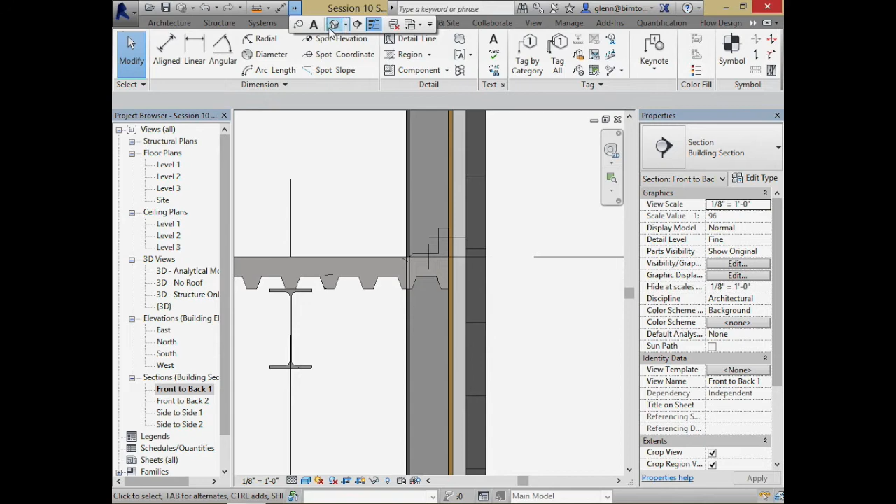Let us then turn our attention to some other matters at hand. Okay, let's go back to 3D. We'll see how this looks. So I got my building hanging around over here. Let's go ahead and look at the structure only. Zoom to fit. Let me turn off those walls again.

Looking pretty good. My building's looking fine over here. It's got all sorts of floor support. It's got some roof support. It's got columns. Loads are hopefully coming on down to the ground, although we should put a little structural support down there to make sure that we're not overstressing the ground.

However, my building's in trouble. And my building's in trouble for the very reason that so many buildings collapsed during earthquakes. It's got all these nice sticks pointing up, but as soon as anyone just pushes a little bit on the side, it's highly likely it's going to go, and it's going to tilt, stuff like that. We need to provide a little bit of lateral support. So let's talk about that.

Because lateral support is an ever so important issue. We're very aware of it here in Northern California because of the earthquakes. We're very aware of it when we're doing tall buildings because of the wind forces, which actually need to be much stronger as an effect than the earthquakes. But either one of those two forces could dominate. What it really means is that we have to brace the building for something that's happening sideways.

It's interesting. Gravity loads are actually relatively constant. The weight of the building and us dancing around in it, that's most of the time. Snow on the roof every once in a while, but it doesn't change drastically. Earthquake loads, you gotta picture this. One day you're sitting there, perfectly happy, and someone just comes rushing at you, 100 miles an hour, and pushes as hard as they can sideways, and you weren't even ready for it. And you have to respond to that.

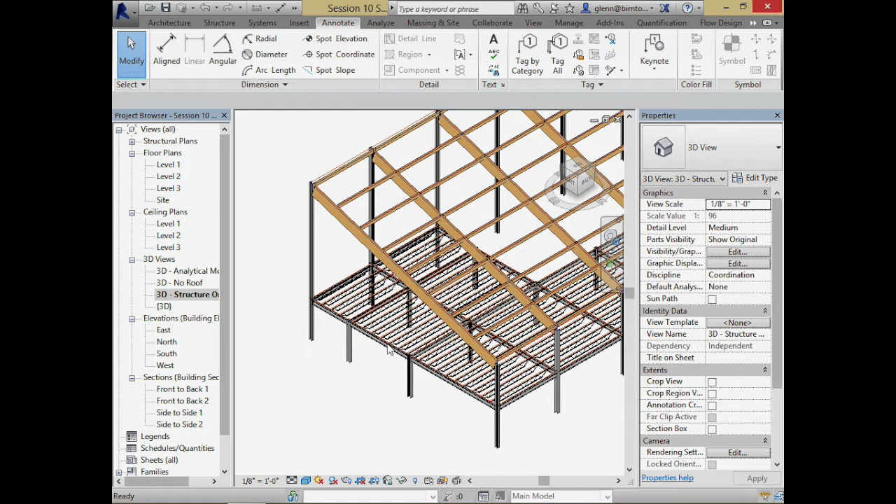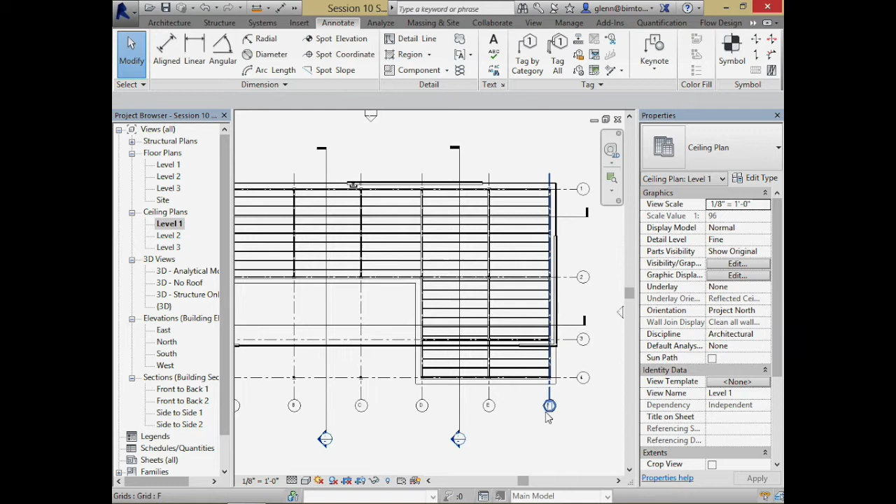So just so you know, as we go through and think about our building, let's look at it in the floor plan view. Basically, we have to resist the lateral forces on each of the different sides. So we have to resist them in the back wall, in the front wall, in the side wall over here, and in the side wall over on that side.

So at the bare minimum, we have to have reinforcement in both directions. It doesn't have to strictly be at the exterior wall. Depending upon the length and size of our building, it may be enough just to do the ends, but you may have to actually put some in the middle too to resist it. It's really this whole notion of you need to have some sort of resistance. Actually, let me even draw this. That might be easier.

So we'll start with a simple case. These are my walls of my building. I'm putting a lot of load on the building. Picture the floor of the building or the roof acting like a big beam to resist all that load. We need to provide some resistance. Half of it's going to come from this side, half from this side. So it's kind of like simple beam mechanics.

In terms of where that resistance comes, usually we'll put some sort of bracing in the walls. I could put that bracing over here, or over here, or all the way back there if I want to. It really doesn't matter a whole lot. Just somewhere along the line, we need some bracing to provide that resistance, if we believe that, like a column, it's not going to collapse. But generally, it's pretty well braced. So we're going to put some resistance that way.

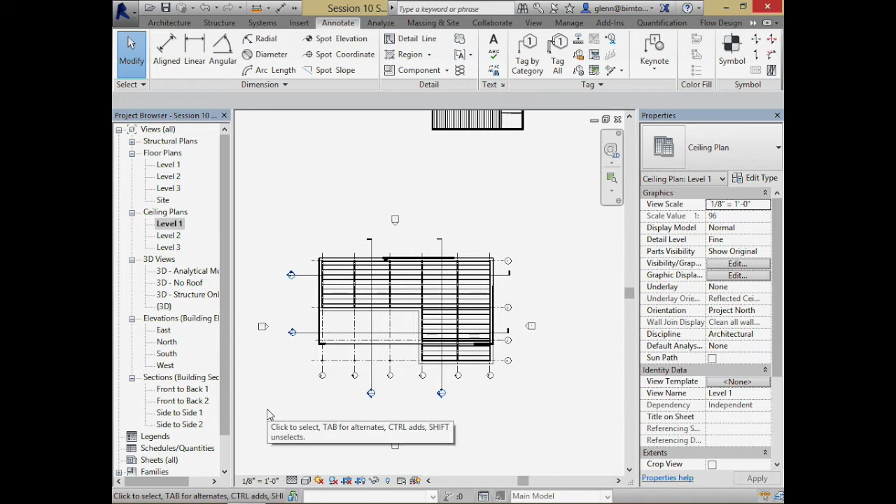So I need to get some lateral resistance, and I have a couple different ways I might approach it. Let me go back out to that structure. I'm looking at the back of the building over here. I can approach it in a couple different ways.

I have these really nice frames of steel going on here. If I wanted to stop that steel frame from racking over, there's a couple of ways I might approach it. If you have a frame and you want to stop it from moving, what are our options? What can we do to stop that thing from moving? How can we add braces to it? Yep. So one thing is to do something like that.

Another way is to do something like this. In fact, if you go over to the Wong basement, you'll see a lot of that kind of hanging around inside the building. A third way we might do it is to actually go through and really reinforce these corners and make sure those are incredibly rigid.

So, with those three strategies, you have the K-brace, the X-brace, or the ever-popular moment frame. Let's think about those three different strategies. Well, actually, let's talk about another one. That's really gross.

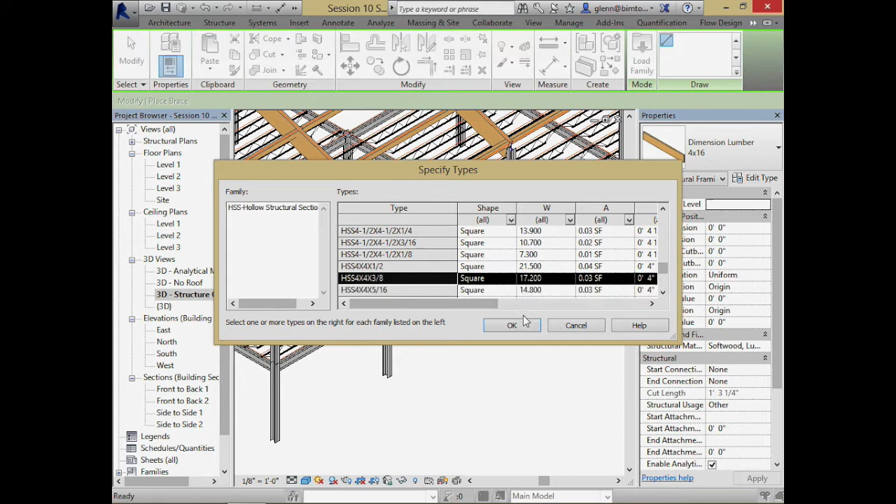Oh, that wide flange 12 by, that sounds awfully big. I'm going to go for some tube steel or something like that. That might be a little kinder. So I'm going to go structural framing. And again, not to worry, we'll figure out how to size these. HSS, thank you so much. Hollow structural sections. Let's go for some 4x4s by 5/16. Yeah, 3/8. Again, we'll figure out the sizing. So I got some hollow steel.

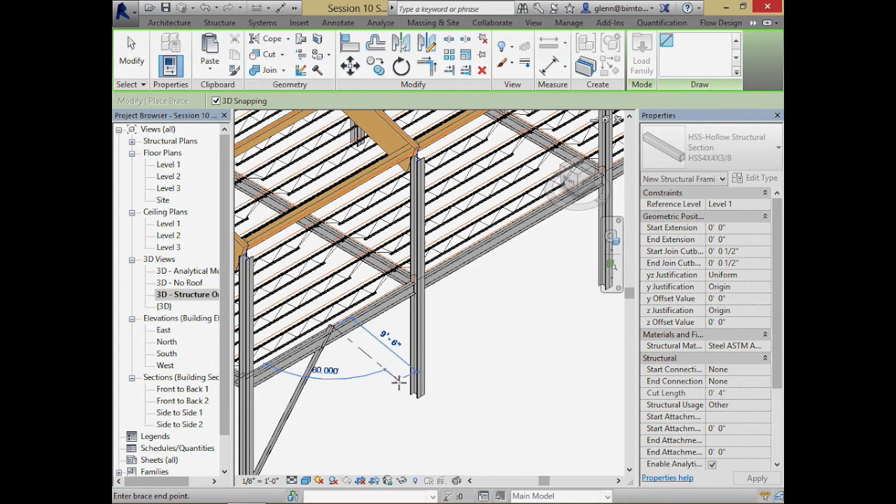What I can do now is, I'll go from the bottom here. I'll go up to the midpoint of the beam. See if I can get to the midpoint of the beam. I'm very bad about snapping sometimes. Oh, there it is right there. Oops. Boom. I'll snap it down there.

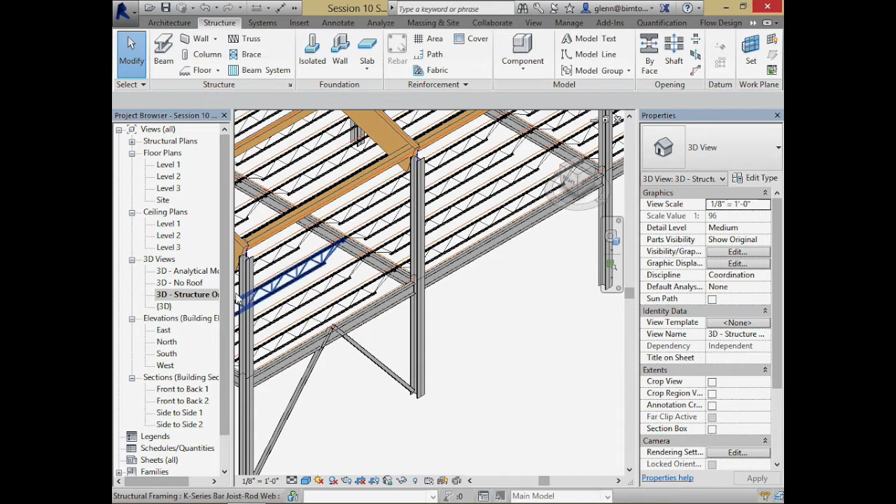Now again, you're going to say, hey, that looks kind of wonky. That's not right. Yeah. Analytically, it's right. Graphically, it's not looking so right, but that's okay. We can fix that. Ultimately, we'll do something there to cut off the tubes and cope it and put the haunch in and stuff like that. But how do I know it's analytically right? Because if I go back to the analytical model and look at it over there, I can see that's actually looking pretty good in the scheme of things. That's not too bad. So I got a K-brace there.

Let's zoom on out. At my first floor, that may be sufficient. That may be enough to just have it on that one side. I might want to also put one over there and split the load. That would actually help us with a little bit of symmetry. Very often having all the lateral load on one side of the building introduces funny torquing, and that's not so happy in terms of what could happen. So maybe I'll put one over there too, and that would allow us to split the load.

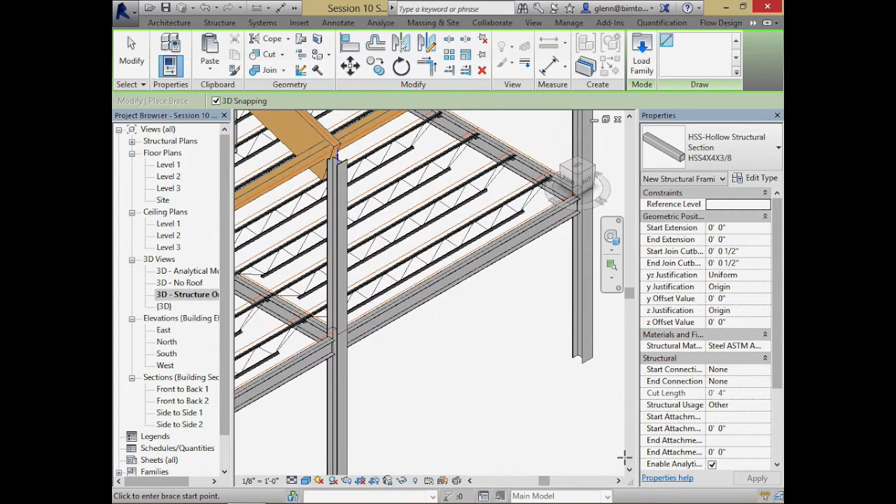But architecturally, what you end up having to do is think carefully about where is the best place to put these. Bracing, bracing, bracing. I'll go from here up to there somewhere. Sometimes I have a hard time finding middles. I should snap. There we go.

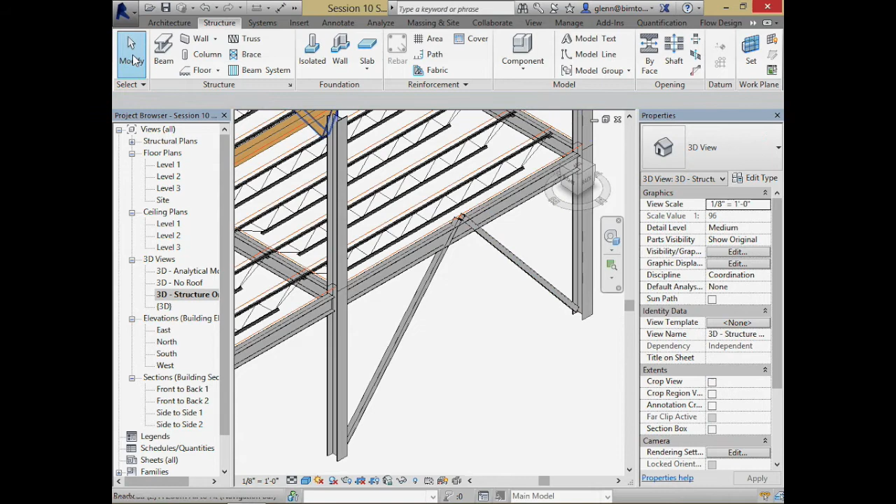Okay, and that'd probably be a little bit better. Okay, in the scheme of things, see any problems with K-bracing? K-bracing works very well structurally. How about architecturally? What's that? Yeah, it could be.

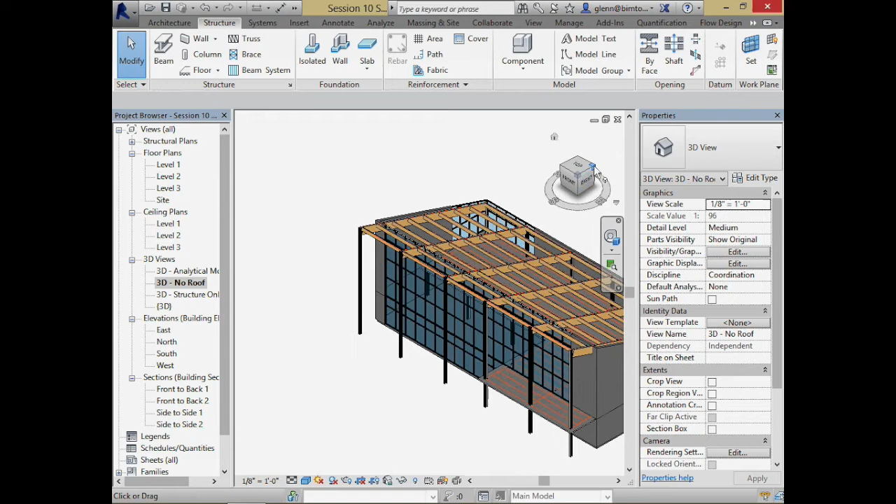In fact, as I think about my building, I probably wasn't very smart about this, because if I go back to my building and go rolling around back over there, I conveniently put those K-braces right in the middle of my big glass view, so that probably wasn't a very smart move. Architecturally, it probably would have made more sense to put them somewhere here in the middle, behind all that closed panel, and that's okay. Again, as long as we keep it balanced, we're going to be okay.

There's better, yes? If your structure is inside of the architectural facade, yeah. So you're just having the K-brace in the middle of the room, essentially? Yeah, it's actually in the room a little bit. What will often happen is it'll get enclosed by something so you don't have to look at it. Even in this building, if you want to see the braces, go to the copy room right behind me here, and you'll see them coming down. There's this big diagonal brace coming through.

Or if you go into the long basement, right to the center of the big student area where we're working, kind of under X, you'll see them all hanging there in the entrance. So sometimes you leave them exposed; it could be architecturally interesting. Sometimes you hide them. It depends on what you want. I kind of like keeping them exposed, but you've got to think. K-braces do have that thing of, well, they're there. They're in your space. So let's go back to the structure only. So K-braces aren't too bad.

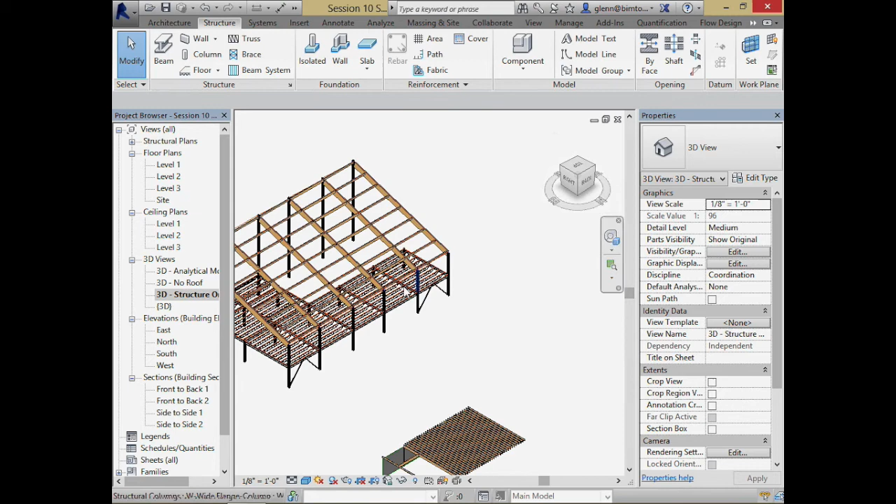Another way to approach it, closely related, is the ever popular X-brace. So how do X-braces work? X-braces would work, although it probably wouldn't be a great solution here, because I should put a steel beam up there to really make it work nicely. But I'll put something across there and put something across there. Now again, that looks like it's just crossing. There would actually be some sort of a connection in there with 4 different tubes coming off of it. That's actually how it's done over in Wong.

So ultimately, is there a lot of difference whether it's a K-brace or an X-brace structurally? Yeah, the X-brace is more efficient. Okay, just a better shape. Yeah, with the K-brace, you put a lot of load in your beams. You have to make bigger beams and have them carry it, whereas with the X-brace, it's all handled just on the endpoints. Okay, so X-braces can work. There's a little fabrication, but again, they're a very good solution, so a lot of times we use X-braces. That's probably the most common thing I see, X-bracing hanging around.

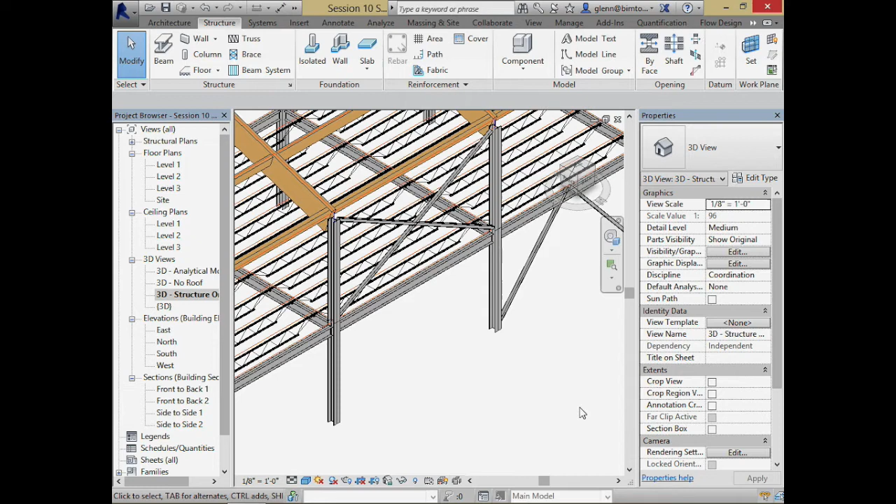So we're pretty good in terms of what's going on here. Either of these ways, they're probably pretty similar in cost and pretty similar in visual impact. K-braces may be a little bit better in that you have a part that isn't so obstructed, versus this, which is pretty much squarely in the middle of the bay. That's not so good looking. But either of those methods works out pretty well. You add a little extra steel, everything's put together nicely. Okay, let's go popping around to the other side of the building.

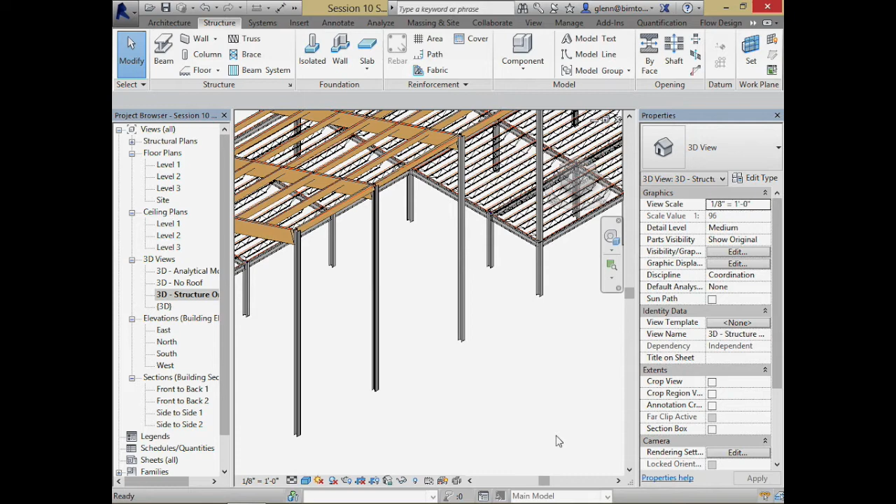Kind of more interesting out here. This is, for example, where I have these giant columns coming all the way down from the lower patio area all the way up to the 3rd floor. So I could put a big X-brace or a big K-brace in there, but that might be more architecturally impactful, so I may not like that so much. So then I pull my 3rd trick out. I can start thinking about a moment frame. Let's talk about what a moment frame is. I'll just put it right in the center here. I'm ultimately going to put a piece of steel there to make it work, because it is going to require steel.

Here's what we're going to do. We're going to take that piece of steel up here and these columns over here, and we are going to weld the hell out of them. We're going to go through and put all sorts of steel reinforcement in here, weld it all together, and make something that is so incredibly rigid as a big U-shaped frame that it is not going to allow any movement in the case of these lateral loads. Okay? And we can do that.

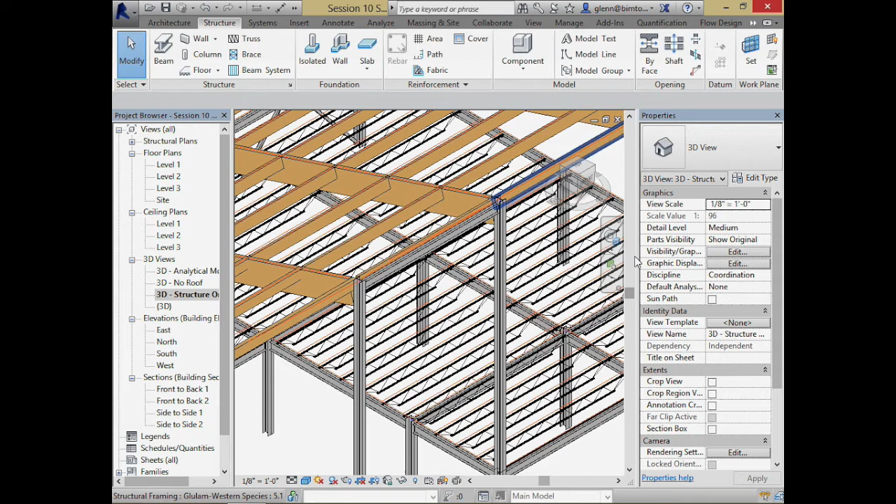You'll see incredible double wall, multi-layers of plating and welded reinforcement here, and they come on out to the site and erect it there. What happens is this thing typically gets welded out in a shop somewhere and brought out to the site in a big frame.

It's kind of a nice way of doing it from the standpoint of visually, it's very low impact. It takes care of the loads in a nice way that doesn't impinge on the architecture at all. But trying to carry everything through a perfectly rigid frame that's going to carry all those loads is an expensive thing to do, and it puts an awful lot of structural loading on that thing. So this whole frame itself may be one of the most expensive structural elements you're truly working with.

But moment frames are there when you need them, and use them judiciously. It is there if you really need to keep things open. It's just another way of doing it. And as we specify them, it's really not all that different. Let me show you actually where they live in the scheme of things.

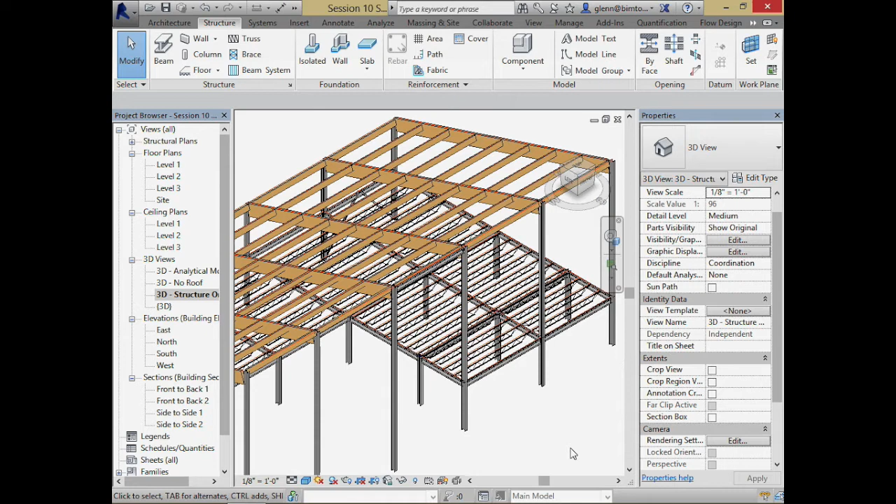As we think about this model and how it works, I just put a piece of steel in there. It doesn't look too awfully special so far. It has these start and end connections. I can say that it's a moment frame right there. And that'll be enough to basically say that analytically I want to treat it a little bit differently, that it's not just going to be a pinned connection. It's going to actually have some moment resistance to it. So moment frames, again, pretty good as a way to do it, although expensive.

Third way we might approach it is, look over here. I don't really have much to work with on that end wall. You can start thinking about using wall panels. And wall panels can be very, very good for doing this. There's a lot of different types of wall panels you can use. You can use concrete wall panels, which is very efficient because in the concrete you can embed a lot of steel, and concrete's actually pretty good when it's reinforced at resisting the lateral forces.

You can actually even have steel shear panels called Hardy Frames or Strong-Wall panels. They have these different hybrids that are available to resist lateral loads. But if you want to put some sort of a structural shear wall in there, let's talk about that. How it would work is something like this. I'd come over to, let's say, level 1.

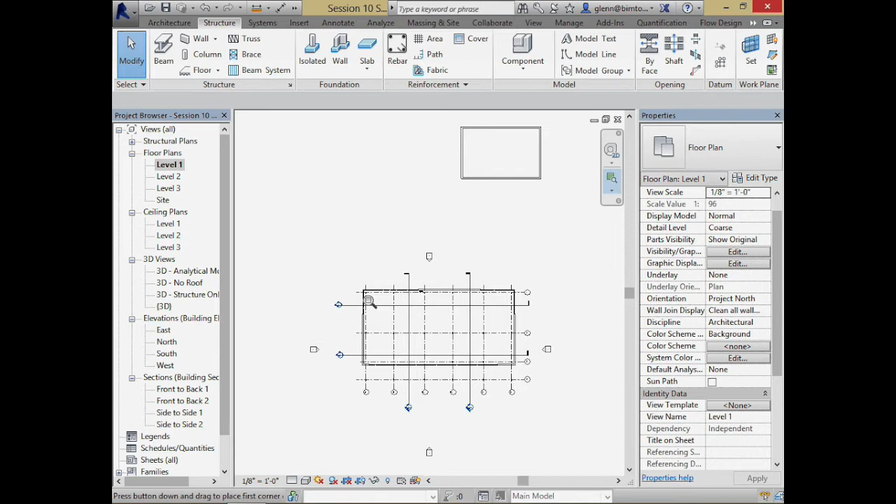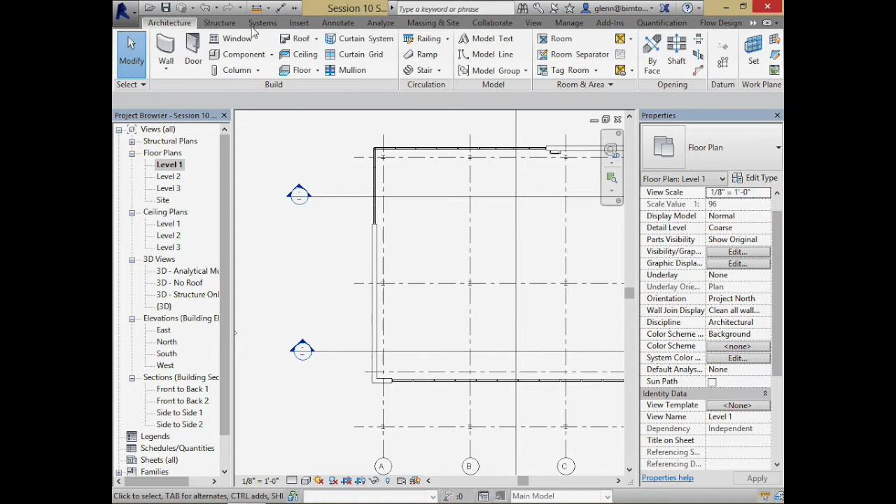And somewhere in that wall, I'm just going to cut out a section of it right here, just so I can change it. Well, I could put it inside if I want to. I don't actually have to put it in the facade. You can decide either way you want to go with it. But if I want to put it right in the facade, architecturally, what am I going to do? Let me choose the wall. Let me cut some section of it.

And say that some section of that is not going to be strictly just the architectural surface. It's actually going to be concrete. Put concrete in here somewhere. There it is. Some sort of concrete wall. We can fix that up so it looks right from an architectural standpoint.

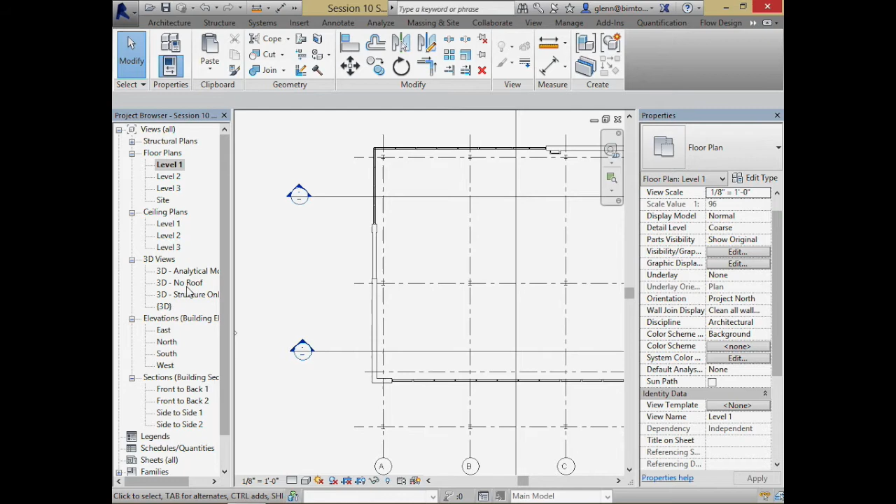So over on the sidewall now, you have some sort of hybrid of materials. What I have to do, though, is run this all the way up. It's not good enough. Well, you can sort of break them, but the more common thing is to actually go through and have these run all the way up the building. So have something like this actually go all the way up to the top, and ultimately get chopped off by the roof.

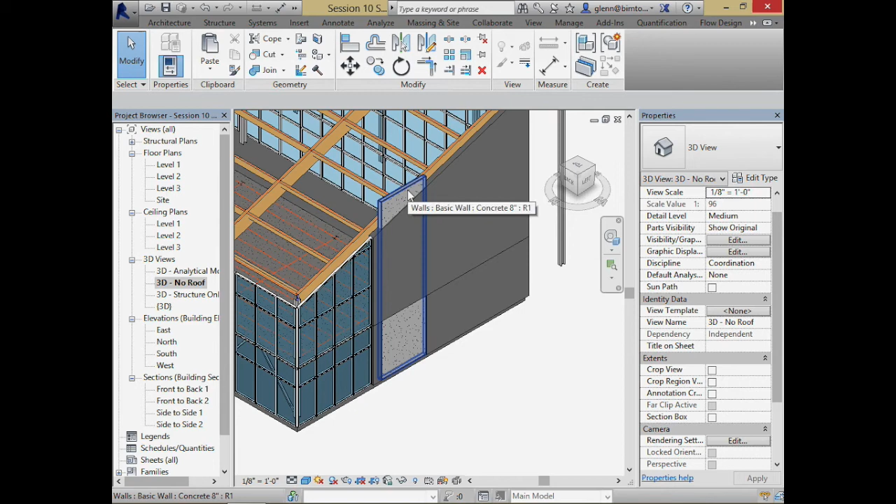Because really what I want to do is basically catch the roof plane as well as the second floor plane and carry them all down to the ground. So I should do the same thing about cleaning up what's happening over here in this wall. And ultimately, this thing is just going to get attached to the roof. So if I go back to the 3D, flip it around, and I can say attach that to the roof, you'll be in pretty good shape.

In my structure only, I took out the walls, and I put the walls back in. There's that wall. If I want that to be a structural wall, I just need to turn on the structural capabilities, and then I can decide, does that need to be considered as a bearing wall or just a shear wall? Either one of those will work, depending on what load case you need. And that's enough to kind of do that.

So what you're going to do is actually start putting in these lateral load resisting elements too, at least on all 4 sides, but we may need some more in the middle, and we'll kind of get to that. But we do that, and that's really how we start resisting the lateral loads. And as long as we have different resistance mechanisms in each of the different planes, we should be okay. But again, we'll analyze that and figure out where we end up.

How much wall you need really depends on the qualities of the material you're using. Concrete reinforced, very, very strong. You probably don't need a huge amount of it. In a lot of light frame wood construction, we actually use the plywood sheathing on the outside of the wood studs as our lateral resistance, and you have minimum lengths that are necessary, because plywood sheathing on the outside of the wall is good for like 240 pounds of lateral resistance per linear foot, something like that. Concrete reinforced much, much better. Steel, even better still, but there's some engineering behind it, and we'll work through that.

But what this will lead us to is we're probably okay enough in our building; we'll have some here, we'll have them on the outside. Our building's not so big, but if you have a lot of lateral loads, because you have a very tall tower and you have to carry all the loads down from 50 floors, or you have a very, very big building, and the distance between the outside walls is too large so that you can't really count on the floor acting like a beam, it would deflect too much. You start adding these things called cores into a building, and that's where it gets really, really interesting.

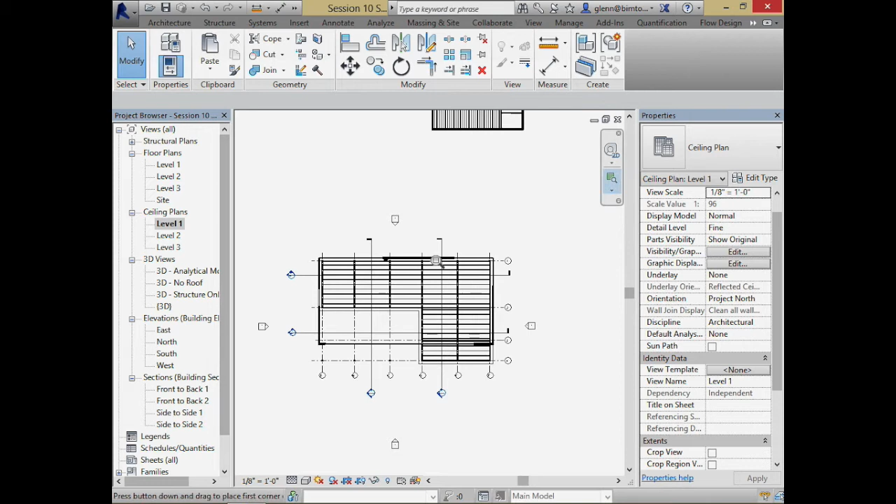So if I needed to add some structural support, and the outside walls weren't good enough, I needed to put some structural support in the middle of the building somewhere to do that lateral resistance. You say, okay, I can do that. Let's go out, we'll grab a wall, we'll make it a concrete wall. We'll make it structural in a second here. I have to place it first. Okay, I'm going to go through and put some sort of core in here.

And I should actually make that go all the way up through the building. Typically these will go all the way from level 1 up to the roof or something like that. Make that structural. Okay, and we have this ability now to put some walls in there. Now, the cool thing about these cores, or how they tend to work together in buildings, is if I need a wall that's going to run all the way from the base of the building up to the roof, you think about the architectural features and what sort of things do that, there actually is a very logical place to put them.

Things that tend to run all the way up the building are elevators, which tend to have very straight walls. Stairways tend to have very straight walls going all the way up. Even mechanical shafts tend to have very straight walls going up. So what do we tend to do?

If we're going to have some sort of core to resist the shear, we tend to use it also as the elevator and stairway and mechanical shaft too. Because it gives you this nice ability to have something with a structural purpose as well as the architectural and mechanical purposes all at once.

So what we'll typically do is we have some sort of core like this, but then we'll add an element that we call a shaft to it. And what is a shaft? A shaft is really just a void. It's an opening. Put it in there. Make it go all the way up to level 3.

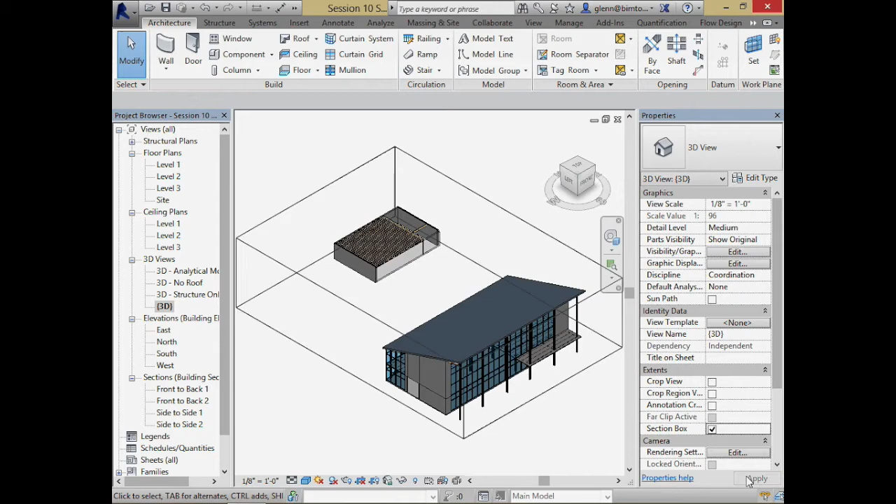Finish it. Okay. What the shaft actually does is it cuts away floor and it cuts away roof. So let me see if I can show that. There's my walls over there. I'm trying to come up with a way that you can actually see this. Let's go 3D. Let me turn on my section box. That may make it easier to see. And I'll scoot that over to where the shaft is, more or less. There we go.

So the shaft is now inside the core. Notice the shaft did a pretty good job. It cut away the floor for me just fine. It didn't cut away the structural framing. It doesn't do that. Shafts are good. They'll cut away floor. They'll cut away roof. They'll also cut away ceiling. So if you have any of those elements, they'll cut them away.

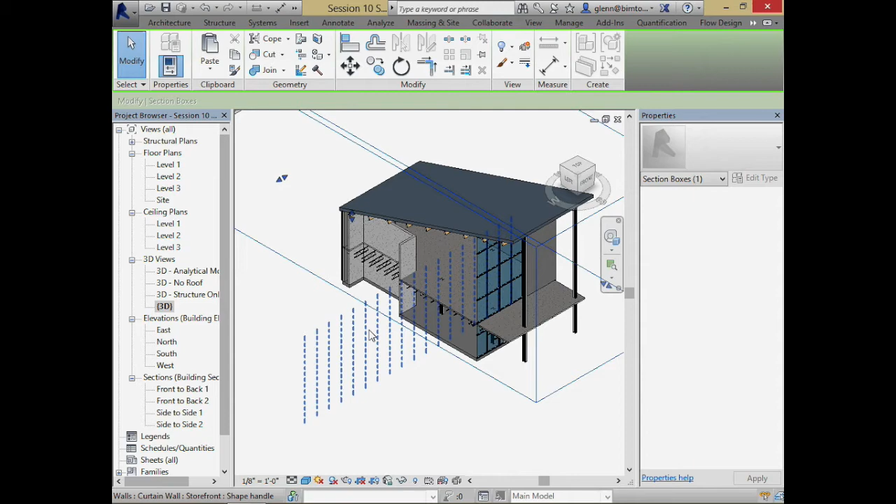It's not so good on the structural framing, so for the structural framing, I'll come back over here and grab that structural framing system. The cool thing is, since it's a system, I can edit it and just put a boundary on this thing. So I could change its boundary to avoid the shaft. Do a little bit of trimming to make sure that looks good. Oops, that wasn't good looking. Finish that up.

See what it does. Actually, those little tiny K-joists on the side probably aren't going to be very happy. I'm just guessing because they're a little bit too small to actually generate. So I think that may give you some trouble. But let's see how this goes. It's still working.

Let's pause and give you a chance to ask questions. So the whole idea of adding these lateral braces or some sort of walls, how's that feeling? Because in your building, you'll need to have some lateral support too, and you can think about exterior walls, or if you have a stairway, and chances are you do, that's again a very good chance to integrate it.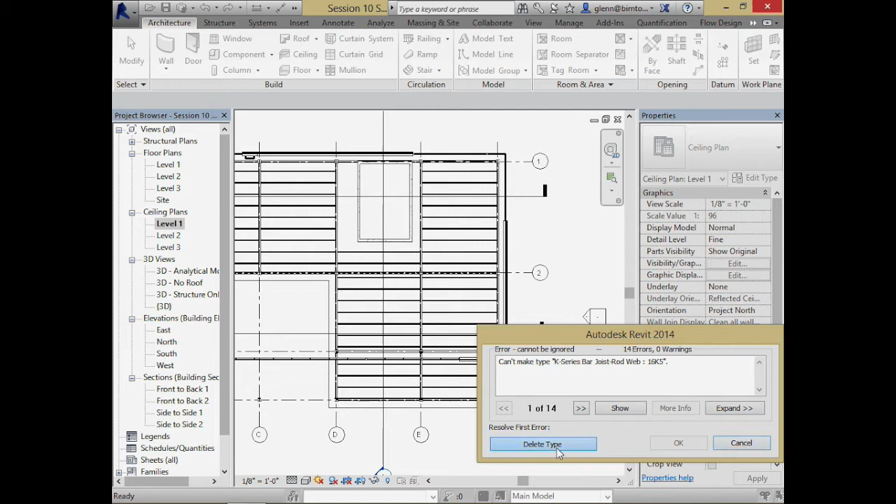Okay, looks like in this case my distances are so small, there's not enough room to make the little K-joists. So in that case, in the area around that shaft, I probably need to shift to a different sort of framing system. In fact, since those are so short, I have to say it can't really be the K-joists. It has to be something simpler like the tube steel, or something that doesn't have a repeated element to it.

The K-joists are just problematic because in order to generate the little spans, there's a minimum length that they would have to be. Let me try that again. Edit the boundary. See if I can get it to regenerate.

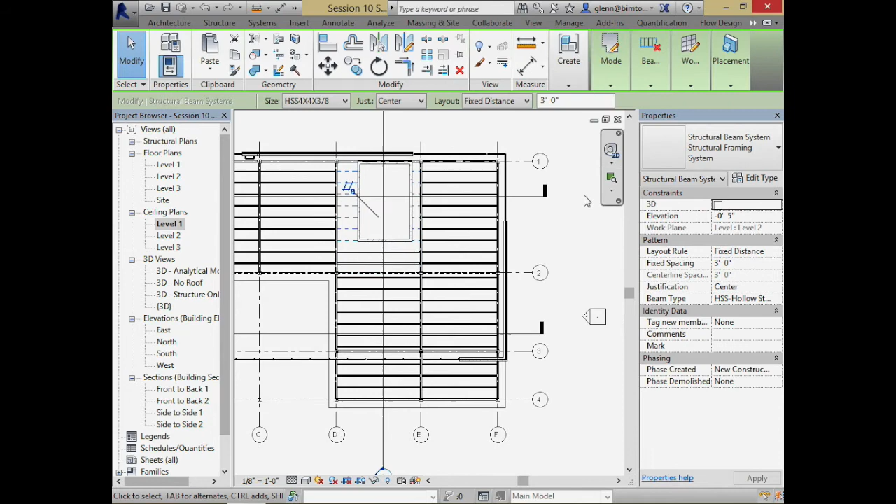Looks like it's sort of messing up on me. Okay. I'll leave that be for now.

Okay. So we got these lateral load systems. We got the vertical load systems. You have a facade related to that. We are almost ready to do some analysis. We're not quite there, but we are almost ready. So let's kind of talk about that final step of how you actually do the analysis and you go with this. Because you've been working so far just inside this system right now. You are ready for the final step. And that looks like this.

So here's my little analytical model. Notice the walls are there. That wall's going over here. That wall's looking good over here. We're in pretty good shape. Okay. When it comes time to actually add loads to this, you can actually add loads in this model too. Okay, so let's talk about the loads that you need to sort of include.

So there's different types of loads. There is the dead load of the building materials themselves. Okay. There are the live loads of us dancing around inside of here, you know, the furniture, the books, all these different things, they all get loaded in there. And there's all sorts of rules about the standard loads we use for different buildings. So, you know, we don't actually do a very detailed calculation.

We tend to use standards that say, like for most living spaces, most common use spaces, the live load is 40 pounds per square foot. Okay, so for every square foot, we imagine 40 pounds here and 40 pounds there and 40 pounds there. And even though I weigh more than 40 pounds right now in this one spot, on average, that's probably going to work out okay because I only occupy so much space. So it tends to work out pretty well as a way to do it.

For the dead loads, based on the materials you're using, whether it's steel or wood, whether it's a concrete floor, stone on top or carpet, whatever it is, we can go through and compute those. We can try and figure out per square foot what we think the dead load is, and just add that all together.

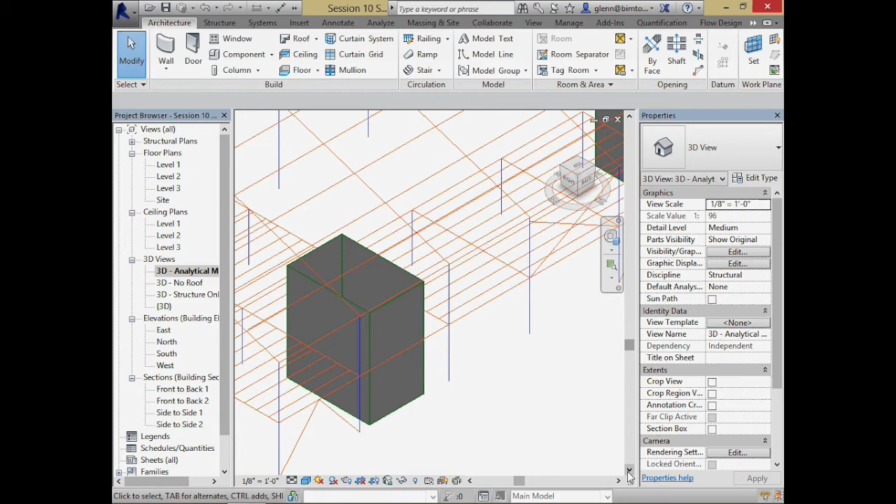Live loads tend to be relatively higher for the living areas, less for the roof, interestingly, because your snow and your occasional rain actually isn't as heavy as we are in the scheme of things, so it's weird. You think the roof would actually have the worst load, but it doesn't. Unless you're in a really high snow area where it stacks up high, maybe you'd have it there. But you can start adding loads to this. Let me go through and flip it around.

Actually, there's one loading condition you have to watch out for that I'm always stung by, because when I do residential construction, I'll often have balconies and areas that are outside. It turns out they're considered much worse than your average living area. It's kind of weird. You think, well, how often are people out on the balcony? What's really going on there? But these tend to be designed almost for the worst case scenarios.

And the problem with your balcony is it's that time when the parade's coming down the street. You have all your friends over who are at brunch at your house, and you're all hanging out there with your mimosas, watching the parade go by, crowding up against each other to get the best view. At that one moment in time, boom, then you get yourself in trouble. It's actually kind of interesting.

If you start thinking about a lot of structural failures, it's often these times when it's parties, and it's times when people all get together. And yeah, there really is a problem. It's sort of extreme use times, and you have to be able to guard against that. Because a collapsing balcony is just never a good thing. Okay, but that's what often happens.

So let's talk about loads and how we'd add them in here. Loads, and we will go ahead and put some loads on your building and have you do a little bit of analysis to test these out. You can apply it in this way. What you got to do is go to the Analyze tab.

Let's talk about creating some loads. And there's different types of analysis here. There's space reporting, there's systems reporting we'll talk about, there's energy analysis. We'll end up using a lot of these different things. Let's just start with loads first.

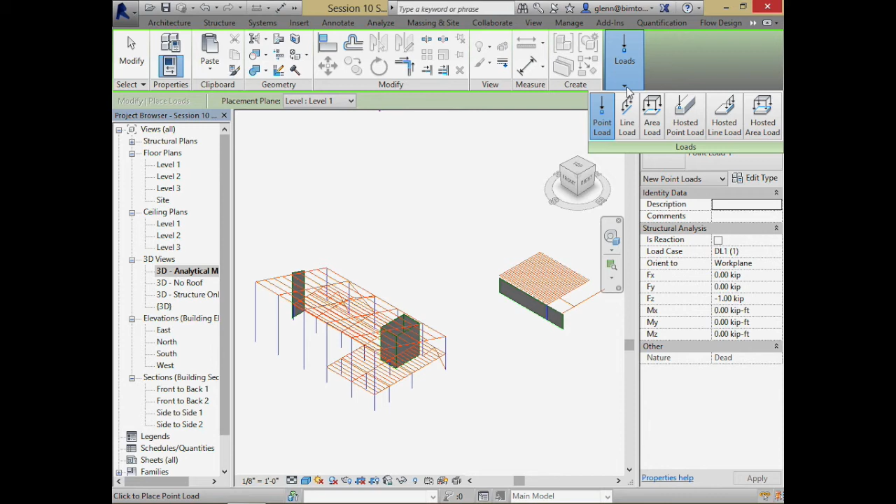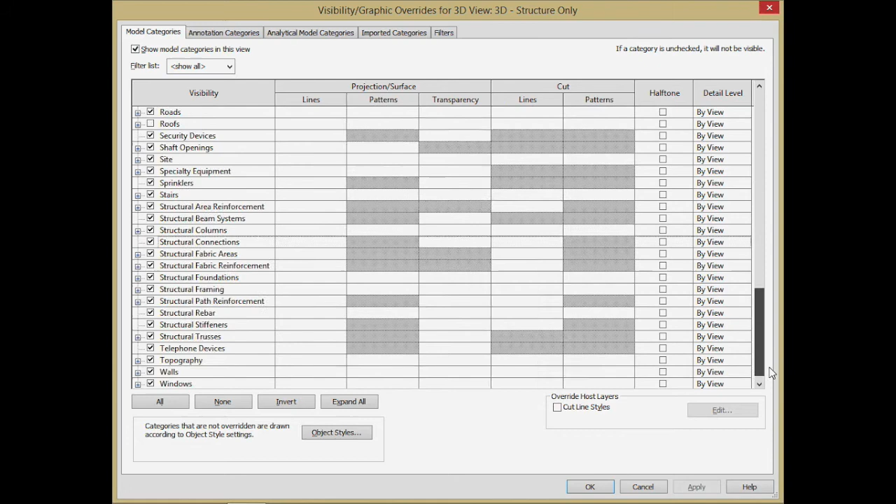Look at my little analytical model. He's looking pretty good there. Let me go to my structure only model. So I just need a surface to put this on. What I want to do is put some loads on the floor. So I'm going to go to visibility graphics, just turn off those walls, but I am actually going to turn on the floors because I want to see those for now.

So I got my floor kind of hanging around in here. I'm not going to worry about that basement floor, the first floor, just yet, because we're going to figure out whether it's a slab or what's going to happen with the foundations of that in a little bit. But for the second floor area, let's start talking about it. We got a big floor area all over, going to wrap around. We got a little bit of it that's actually a balcony out here. So let's talk about how we can create these loads.

And what you got to do is like this. You say load. You say that I want to make it hosted. I'll make it an area load so that if I don't want to just make a load on a beam, I want to put it on an entire floor plane. And then we're going to put a basic loading to it. In the z direction, by default, this is considered to have -1 kips per square foot, so 1,000 pounds per square foot pointing down, which is a lot more than we need. If I want it to be 40 pounds a square foot, it'd be 0.04. Is that right? Yeah. I always have to think about that. Okay. And I can say that's my load.

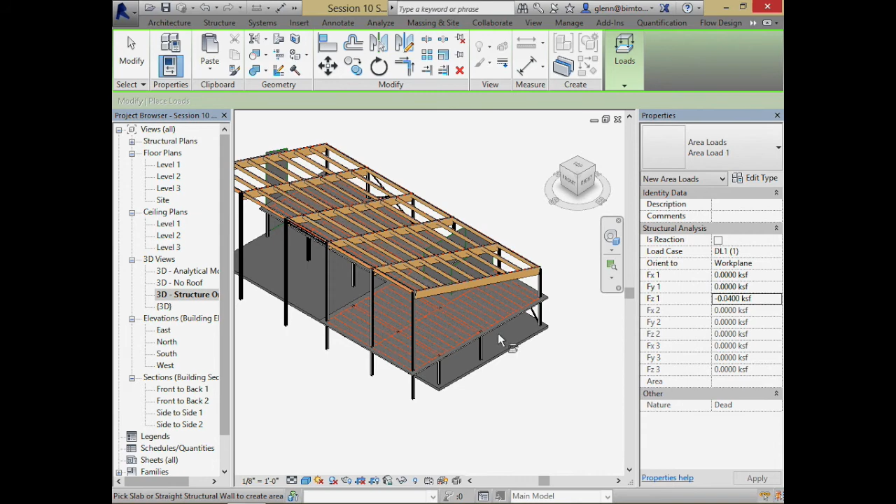Then what I'm going to do is come on over and find a surface that I want to apply it to and click on that surface. Yeah, it's not going to let me click there. Let me see if I have to make that structural. Structural. Let's try that again. Loads. Hosted area load. You going to take it now? Okay, beautiful.

Now you'll notice I've applied this load. It shows up with this little purple line all over the place, and it's looking okay. Although it's not quite accurate yet because it's applying it to the entire floor area. It's also applying it to the balcony area, so that might be a bit of a problem. We might want to separate those things.

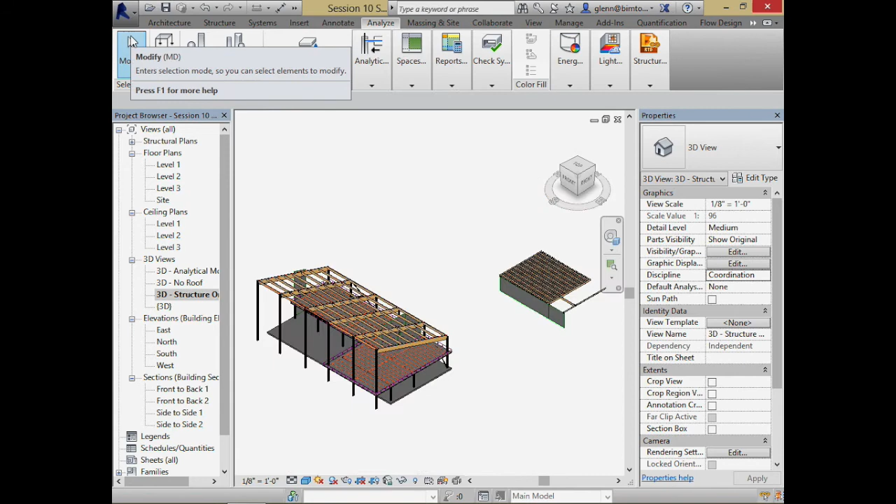What can I do? I could go ahead and add another 20 pounds a square foot just in the balcony area, or I could break it down into 2 separate floor planes, and maybe that's the way to do it. Let's think about that. If I zoom to fit. Oh, let's talk about this.

I've done such a great job of creating a single floor plane there, but I'm at this funny point now where I actually wish it were 2 floor planes. I want to split it, right? You're doing a lot of construction. You start to figure out that it's really not one big slab. It's actually 3 or 4 slabs based on how you want to pour it. Let me show you a trick that is very useful in that case.

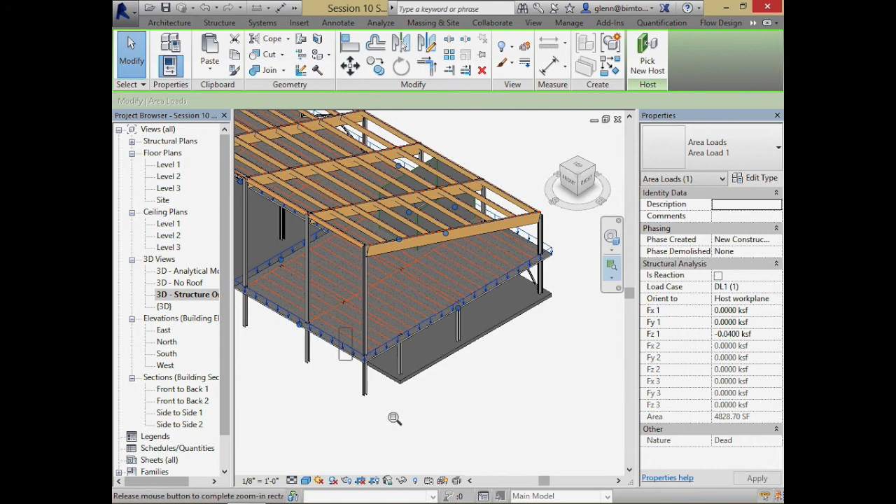I got my slab kind of hanging around out over here. Choose it. It's going to sound very weird. What I want to do is actually copy it and then actually paste it exactly back to the same place. It's going to sound really weird. Now why am I doing that? I actually have 2 right on top of each other, exactly the same location. But I'm going to change them now. And that's what I'm after.

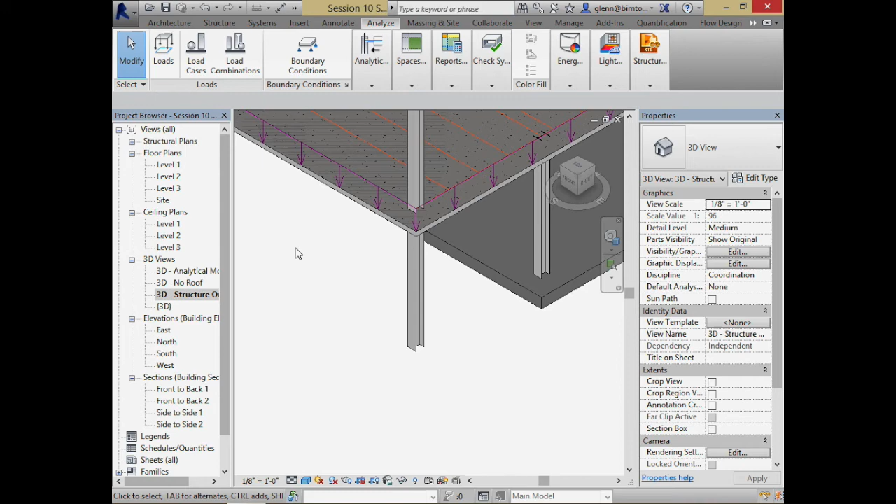Sometimes rather than splitting and then having to recreate the other one, it's actually easier just to duplicate it and then adjust the boundaries of one and adjust the boundaries of the other so they kiss each other, just right on that. Okay, so what I want to do is I'll grab one of the copies and say edit its boundary. And then for its boundary, what I can actually do is just trim, I'll trim this line to that line.

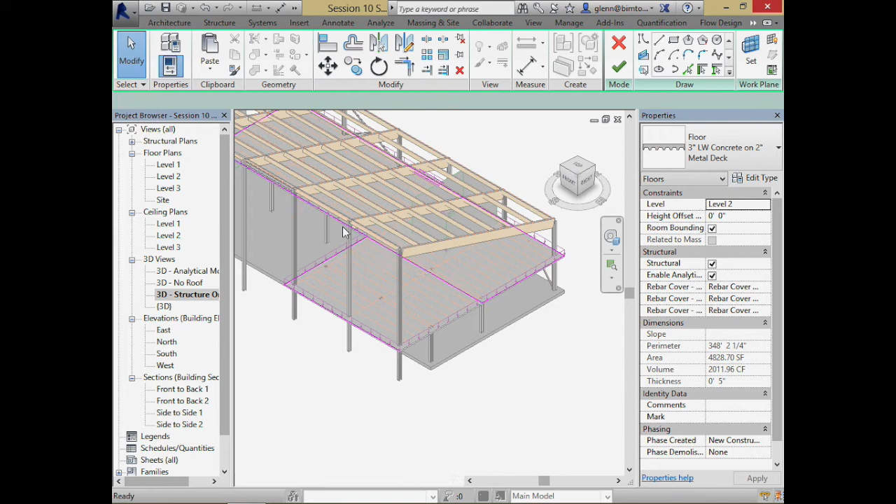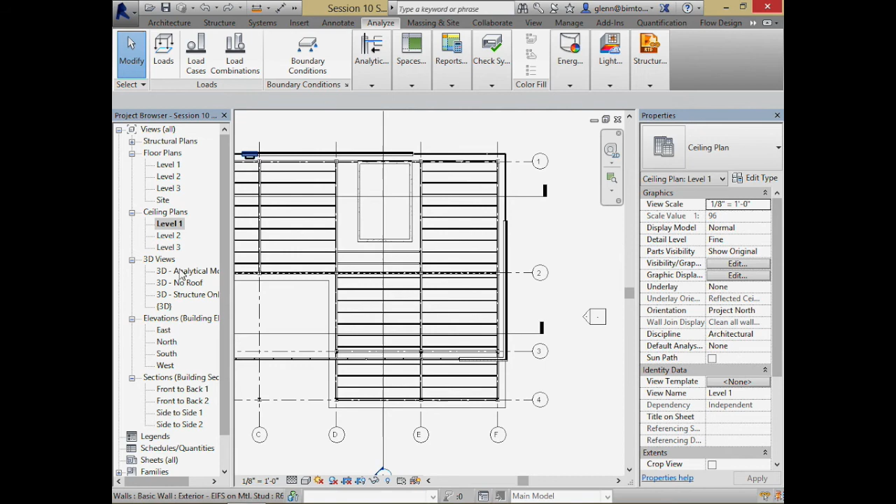Okay, and that's going to be, actually that's not it, is it? Hang on. What I should do is do it in the floor plan. Level 2 floor plan. Level 1 ceiling plan. Did I stop editing the boundary? I think I did. I did. That was not good. Come back out here. Okay. Edit the boundary. Go over to the level 2 floor plan. There we go. Level 1 ceiling plan.

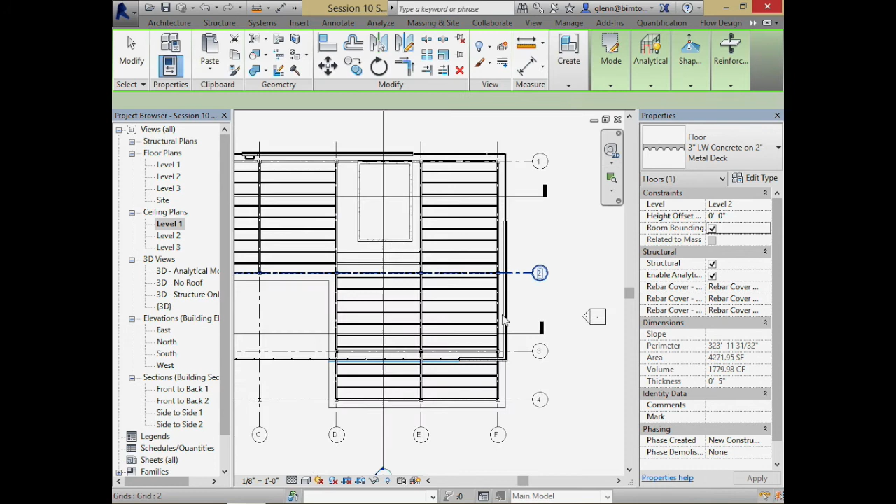What I want to do is take this one and I'm going to back it off so it's just right to the surface of the wall over there. Say finish that up. Then, now that I've done that one, I can take this other one, edit its boundary, and basically cut it in the other direction. I'm going to cut it here to here, and I'll trim it so it's only this piece instead.

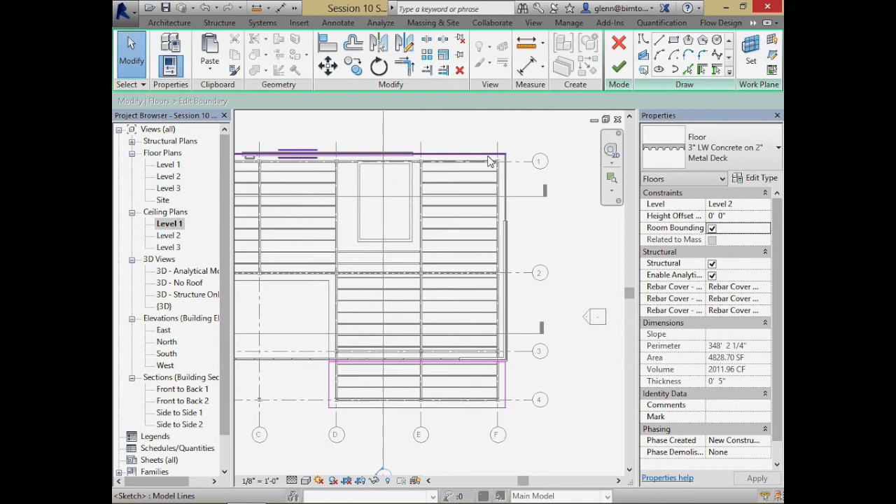Choose that. I'm just getting rid of excess now. So, sorry for the brief diversion. That's just all about trying to clean up two different things. Come on. Oh, it needs a span direction. Beautiful. Close it up.

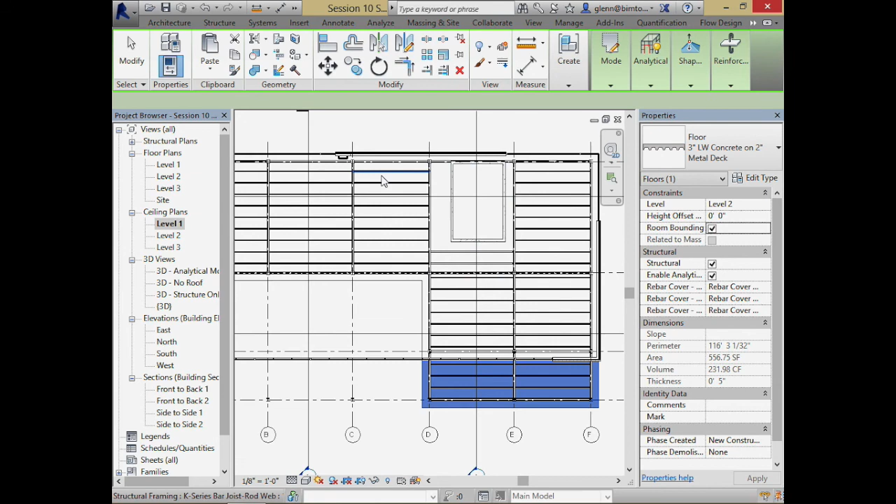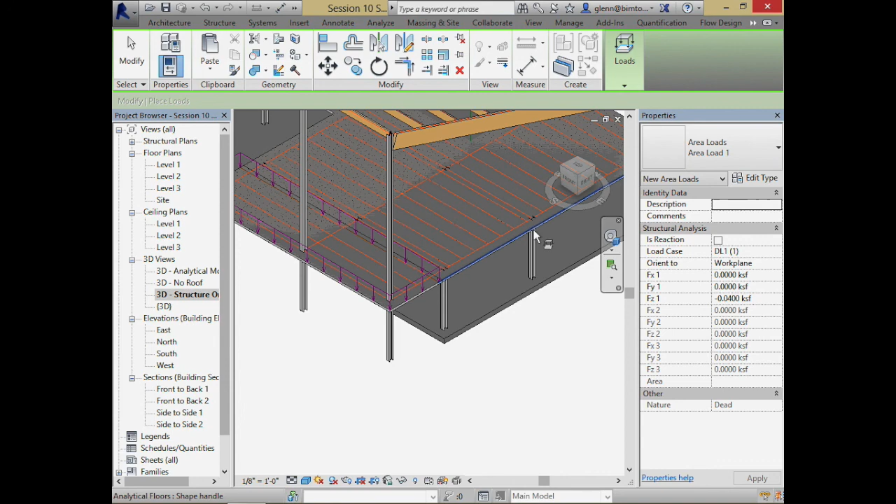Okay, so now with that in place, we can go through, and I just have my 40 over there. Looks like it stuck to the one that was the balcony. I'll take that one and I'll make it minus 60. I'll take the other one and apply the load case out there and make that the 40. So we got two different loads. Then ultimately we're going to do the same thing to the roof. We'll go ahead and put some load on there of like 20 pounds a square foot or something like that. And that'll actually be enough to do the ceiling.

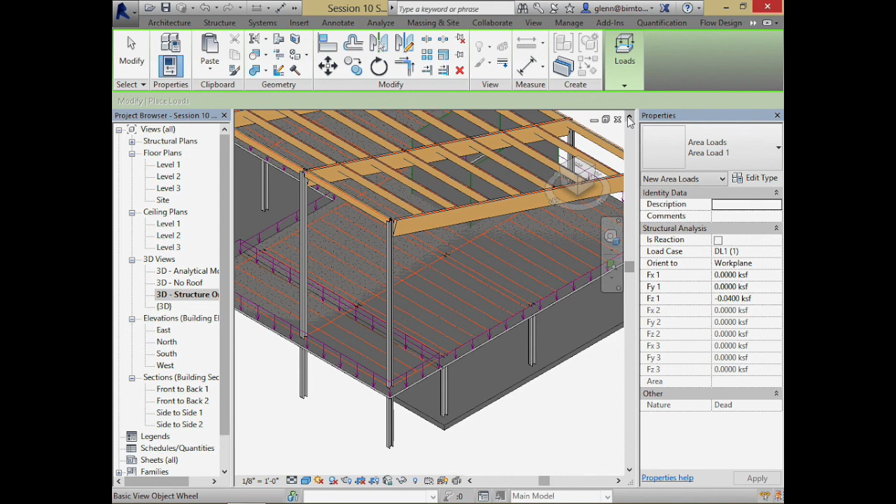So when we come on back, what we will do is we'll finish applying some loads. We are going to go ahead and put some footings and some boundary conditions down here at the bottom, because if we don't have boundary conditions, this thing's just going to move in space. We need something to sort of indicate where it's going to resist. Okay, so we'll put some little boundaries there, and then we'll actually be able to go through and analyze this thing. So actually not too awfully bad. So we'll leave that for next time. I'll just show you boundary blah blah blah. Oh, I'm not going to do it now. I'm going to get myself in trouble. So we will continue with that thread there.

But in the meantime, so you will be ready, please do go ahead and on your structure, see if you can at least get the framing for at least one of the floors pretty much worked out and how the columns there can support it, so that when we come on back on Tuesday, we can actually apply some loads to it, and you can actually see how to analyze it and see how the system will ultimately tell you what the sizes of all the framing members will be, and we'll start to understand whether your structures are stable or not.